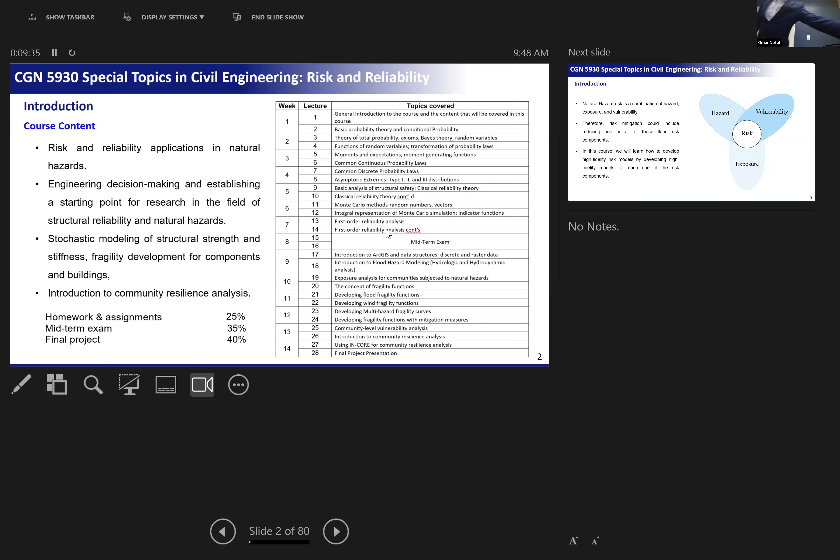So just to start with, what I'm looking for from this class is to get you to be a risk modeler or a catastrophe modeler. When we talk about catastrophes, there are 3 main components: hazard, exposure, and vulnerability. We need to look into these 3 things, because they make a community at risk. So what do I mean by risk? Let's say a hurricane is approaching Florida. That's a hazard, right? It brings wind, flood, storm surge, waves. Those are hazards driven by the hurricane.

But the hazard alone can't make a risk. You need people or built environment to be exposed to this hazard. If a hurricane is approaching Florida, that's a hazard, but it doesn't make a risk in Texas or California. So there's an exposed built environment under this hazard. We need exposure so that we can see some risk. When the hazard makes landfall, it's gonna make some buildings exposed to wind, some exposed to flooding, some exposed to combined wind and flooding. That's what we call exposure.

And when we talk about exposure, we need to know the intensity of the exposure, because maybe a building can be exposed to 40-mile-per-hour wind speed, and another building is exposed to 100-mile-per-hour wind speed. So that's what we are looking at.

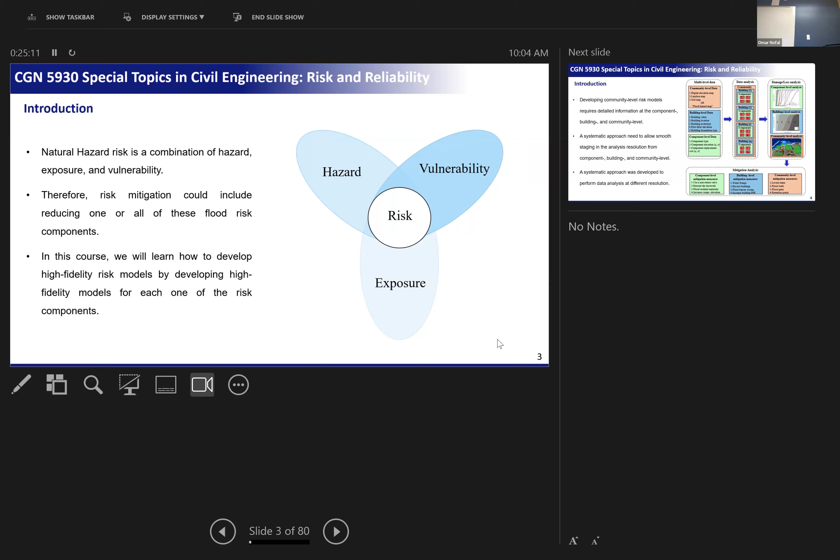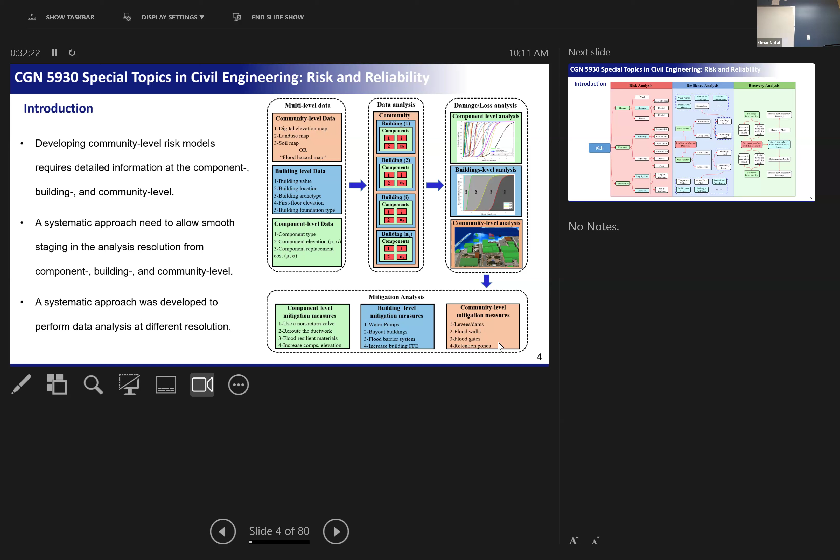Okay. So there's a lot of stuff that we can do. From what I said, you can do a lot of things in this field. You can be hazard modelers. There are people that only focus on the hazard. They don't know how to do vulnerability or risk modeling, and they limit themselves to this area. I'm not saying that they are bad, but I'm saying that they are experts in hazard modeling.

So they do wind hazard modeling, flood hazard modeling, wave modeling. They develop hydrodynamic models, they look at the weather, and that's what they do before a hurricane. They use the information about the weather and the temperature in the sea, take all this information, develop a bunch of models, and provide you with projections of the wind field of the hurricane and the expected storm surge. That's what we call hazard modeling.

And then some analysts take these hazard models and combine them with the built environment to see what is exposed. So you can have buildings exposure, you can have networks exposure. You look at what residential, businesses and social institutions are going to be exposed, and what parts of the transportation network are going to be flooded.

And vulnerability, that's the engineering part, because who can talk vulnerability should be an engineer, because engineers know what this building can take, given the loads on these buildings. Let's say a wind speed of 100 miles per hour is going to hit a building. Who can make an estimate that this building is going to get damaged? An engineer that knows that this building cannot survive this wind speed. So that's our area, the vulnerability model.

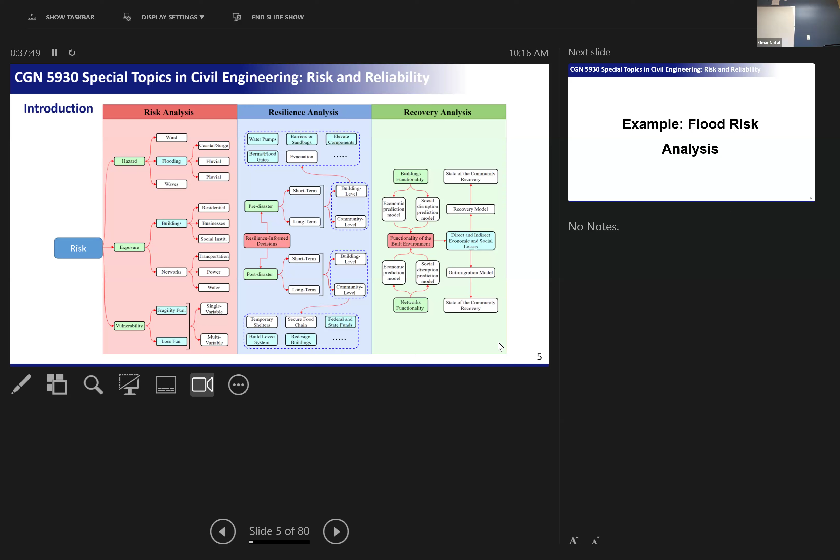Okay, so let's say that both of them are damaged, but you start working very hard on the recovery of your house, but your boss didn't start on the recovery of his business. So all of them need to recover at the same time. So it's a very, very complex process to look at. And there's a lot of research right now going on in this area, how to expedite the recovery of the community.

Okay. All right. I'm going to give you an example. We have like half an hour, so I'm going to give you a flood risk analysis example. Did you guys watch this video? Am I saying it a little bit differently? It's more detail here, right? So I'm going to cover right now the flood risk analysis, but maybe next time we're going to cover the hurricane, maybe not, depends on what I'm gonna plan.

But hurricanes and floods are the same thing. The flood example that I'm having right now, I'm only focusing on the flood depths. But for the hurricane example, I'm focusing on multi-hazard, like wind speed, storm surge, and waves. So it's the same concept, but one of them is a single hazard, one of them is a multi-hazard, but it's the same process.

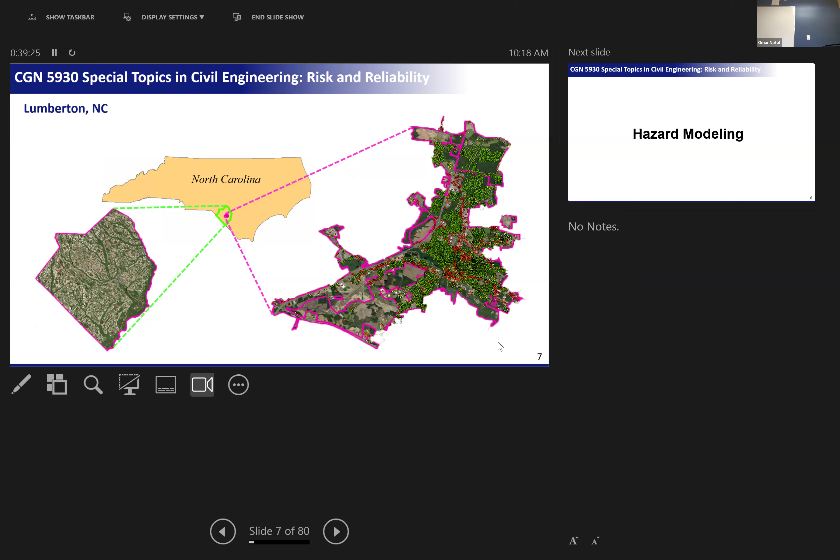It has around 20,000 buildings. All these green buildings are residential. Most of the red buildings are commercial, and the orange and yellow buildings are social institutions like hospitals, schools, community centers. So the first thing that we need to focus on, let's say a hurricane is approaching this county or this state, is how to develop a hazard model.

Okay. So we are going to focus on flood hazard modeling, but why are we doing flood hazard modeling? Because we need to do flood risk analysis. We need to identify the hazard, identify the exposed buildings, and do vulnerability analysis to provide an estimate of damage to this community. So for flood hazard analysis, the process starts with digital elevation map analysis. We have a digital map of the entire land.

Like the digital map tells me where's the lowest land, where's the highest land, so we know where the water is gonna flow. Okay, so we have the digital elevation map, and we understand the basin characteristics. Like we divide the whole land into basins, and these basins catch the water and take the water to the streams, and from the streams to the rivers, and the rivers to each other, and make one flood hazard map.

So we use information about the digital elevation map, definitely, because the digital elevation tells me where's the highest land and the lowest land, and about the soil, because depending on the soil type, it's going to tell me how much water infiltrates inside the soil and how much water is runoff. Like, let's say if I have a rocky soil or a clay soil, rocky soil is not going to allow the water to deeply infiltrate.

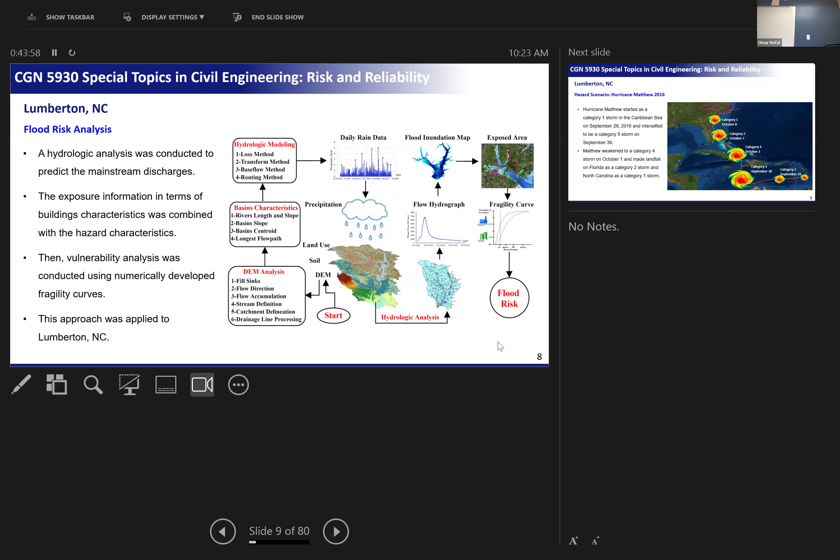And once you know the flood depths at each building, you can go to the vulnerability curve of this building. Let's say I found this building has 1 meter flood depth. I go in the fragility or vulnerability curve and know how much damage this building is gonna have. And I do this with a programming code. I make a for loop for each building, find the fragility, find the flood depth, use the fragility function and tell me what is the damage. Let's say this building is 50% damage. Once finished, go to building 2, building 3, building 1,000, building 100,000. And then you run the damage analysis for the entire community. All right, so that is the risk analysis process.

So let's see them step by step. That's Hurricane Matthew. It started as a Cat 1 storm in the Caribbean, actually intensified to Cat 5 in the Caribbean. But when it made landfall on North Carolina, it was Cat 1, on October 8th, 2016. So the thing is, our community is inland. So the wind speed wasn't that important for this community. Mostly the wind was very bad for the buildings on the coastline. But here inland, it's more the rainfall that is important.

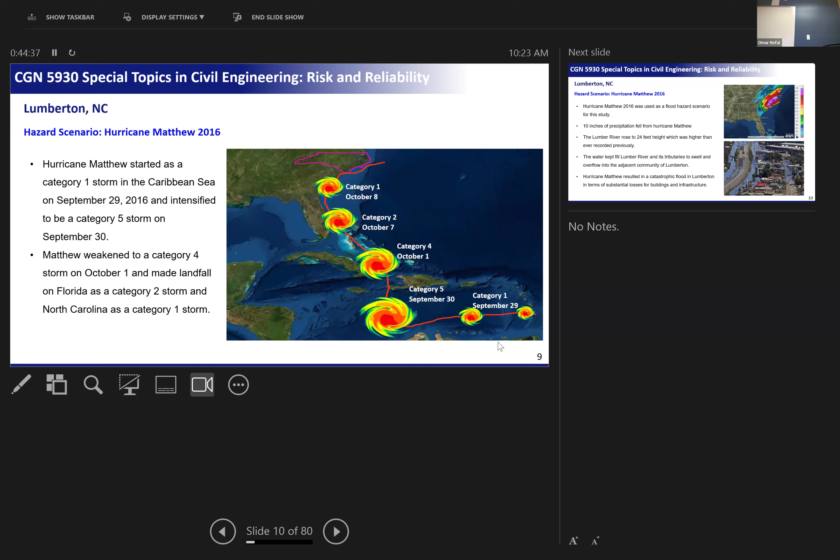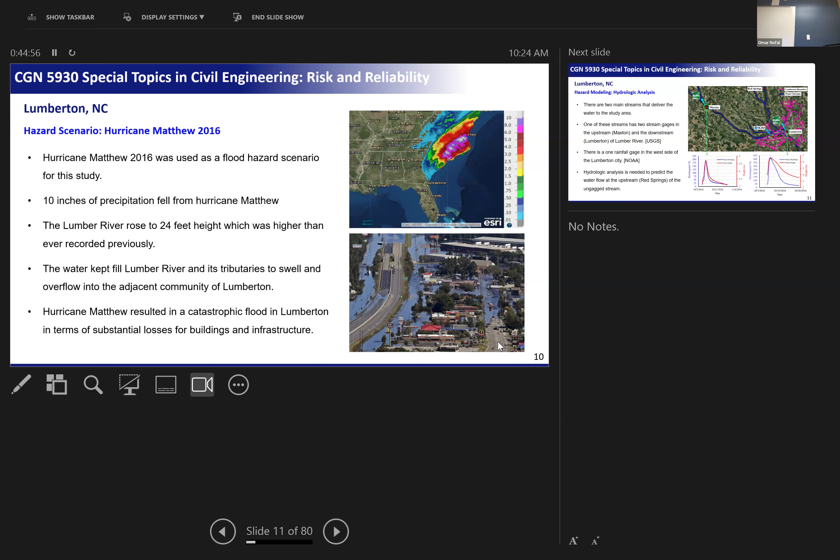So here it shows you the NOAA rainfall hazard maps with the intensity in inches. The purple color, which is here in this area where Lumberton is, is 10 inches of rainfall from Hurricane Matthew in this community. And this is actually a real picture of how the flood looked in this community.

So what we did, we got the hydrograph. What is the hydrograph? It shows you the water flow over time in the streams. Here it shows you how the water flow in this stream went all the way up, and then after the event went down. And here in the city, how does the water flow look?

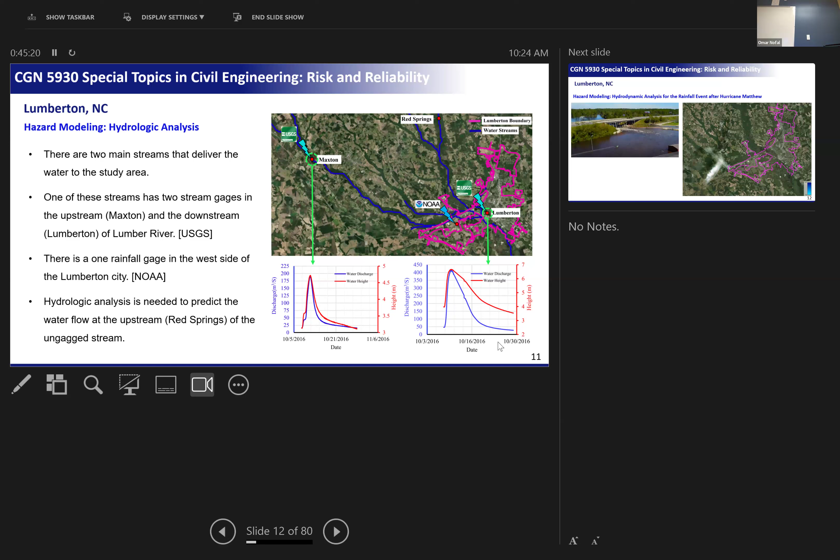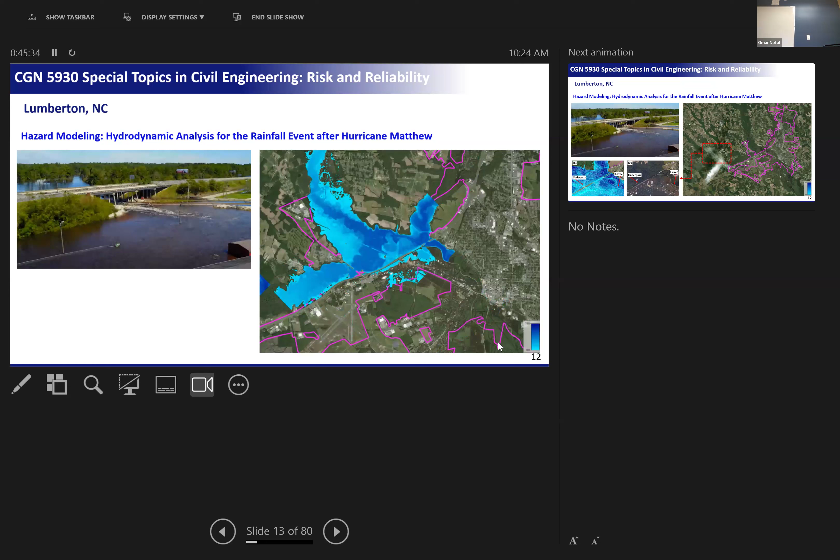So the second thing, we did hydrodynamic analysis. We use these hydrographs as boundary conditions here. And the hydrodynamic analysis tells us how the water overflows inside the community. So as you can see here, we captured everything, even that there's an underpass here. If you look, this is the location of this underpass. Here's how the water from the underpass was flowing, and this is how we modeled it in the hydrodynamic analysis. So that's what our model captured.

That's why we need a digital elevation map to tell us where the elevations are, where the openings are, where the water is gonna come from. All right, so also we modeled, okay, that's something that we're gonna discuss when we go to the probability and reliability. What you saw a few minutes ago was a real event that happened, and we modeled this event. Sometimes we don't model events that have happened.

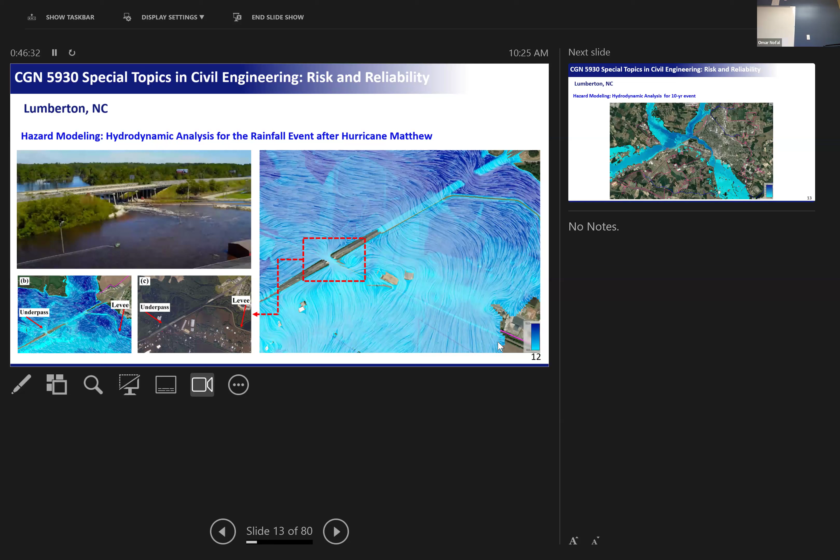We can't wait for an event to happen and then design our infrastructure for this event. We use hazard maps that are based on what is called return period. So for example, that's called a 10-year event. What does the 10-year event mean? It means an extreme event that can happen once every 10 years. Like once every 10 years, this community is gonna be hit with a hazard.

But the thing is, this community should be okay with a 10-year event, right? Because if this community is gonna be flooded for a 10-year event, every 10 years they are gonna get flooded. Okay, if you see here, that's a 10-year event. There's a minimum flooding that can happen. All these are a few inches. By the way, all these are the streams of water. If you see, all the water is contained within the rivers, within the green area. There is no overflow in the community.

Okay, but if we look at the 200-year event, an event that happens every 200 years. Look at this. That's similar to the hurricane last year that we developed. So the water can overflow within the community. That's what we need to design our communities for, mostly a 100-year event. We need our communities to survive a 100-year event flood hazard map.

For earthquakes, I believe it's much more, like 1,000 years or something, because earthquakes are more life-threatening. If the building collapses, everyone is gonna... but this one can be predicted, everyone can be evacuated.

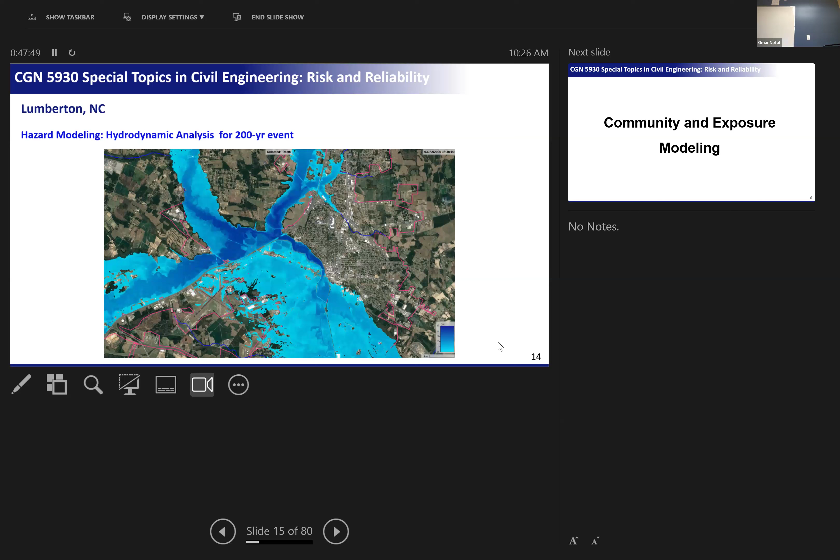All right, so let's say that we have the flood hazard map. The second thing is the community exposure modeling. As I told you, for community exposure modeling, we need to have detailed information about the community, about the buildings: number of stories, building occupancy, use, foundation type, and all this information. Why do we do this? So that we can assign archetypes, right? Do you guys remember that we need to group the buildings? How can we group buildings that we don't know information about? So we need to know all the information about these buildings so we can assign archetypes to them.

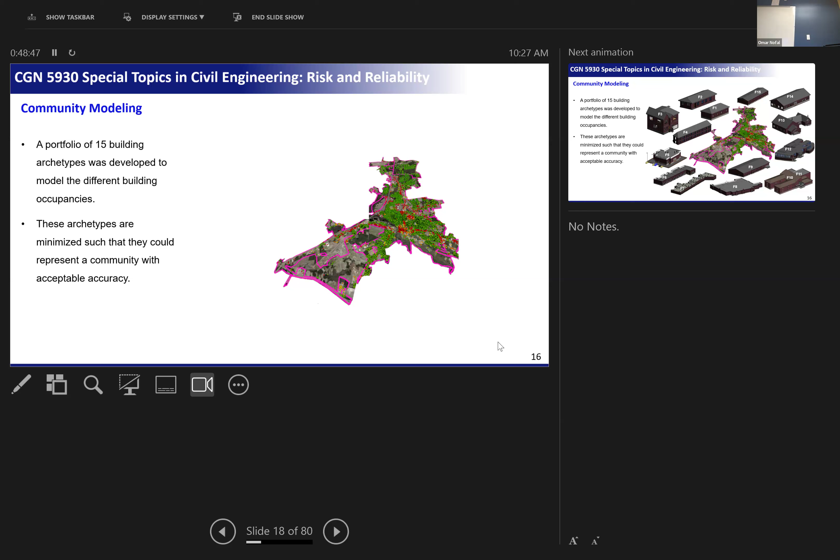And here I'm going to show you an example of how these archetypes look. So I told you that we can do 20 archetypes, 100 archetypes. But the more archetypes you have, the more work you are going to do, because you have to develop a vulnerability function for each one of these archetypes. So let's say that this is our community. What I did, I divided the buildings into 15 building archetypes, like 4 residential buildings, 5 businesses, 2 schools, 1 hospital, office building. So I tried to cover as many buildings as I have.

However, this can work for a mid-sized community, communities that don't have tall buildings. If we bring this to Miami-Dade County, it's not going to work, because here we have a lot of condos. We have a lot of buildings that are 10 stories and 5 stories. So we need more archetypes. So this can work for this community, but for other communities it cannot work.

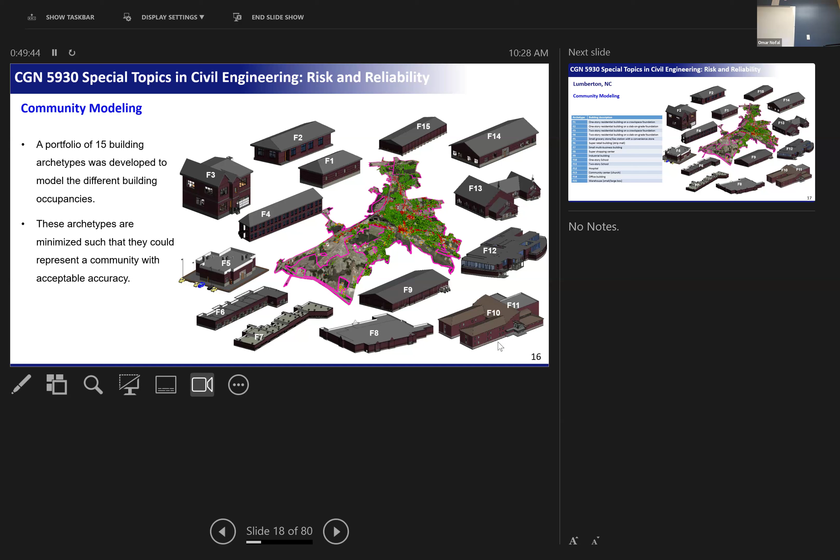Okay. So if I want to apply this to Miami-Dade County, I need more archetypes. But what if I don't have more archetypes? So that's what we call the limitations of the study. That's the only archetypes that we have, and we try to model the building within the limitations that we have. So you need to state that we have limitations, that we don't have enough archetypes to model the building.

Anyway, so that's the archetypes that we have, and that's the description of them. Some of them are residential, some of them are retail, multi-business, shopping centers. The second thing, so I told you I have the community and I have data about the community, I have the archetypes. I need to map these archetypes to the community. I need to know what is the archetype that matches every building. So we do a process that's called mapping process. We need to map an archetype to each building.

So let's say that this is a school and I need to map the archetype to this school. So we develop an algorithm that makes some if statements. If this building is a residential building, and if it is on a crawl space foundation, and if it is this, or if it is this, assign archetype 1. If this building is a school and the school is 1 story, assign archetype 11. If this building is a hospital, assign archetype. So that's what the mapping algorithms do. They map the archetypes to the building.

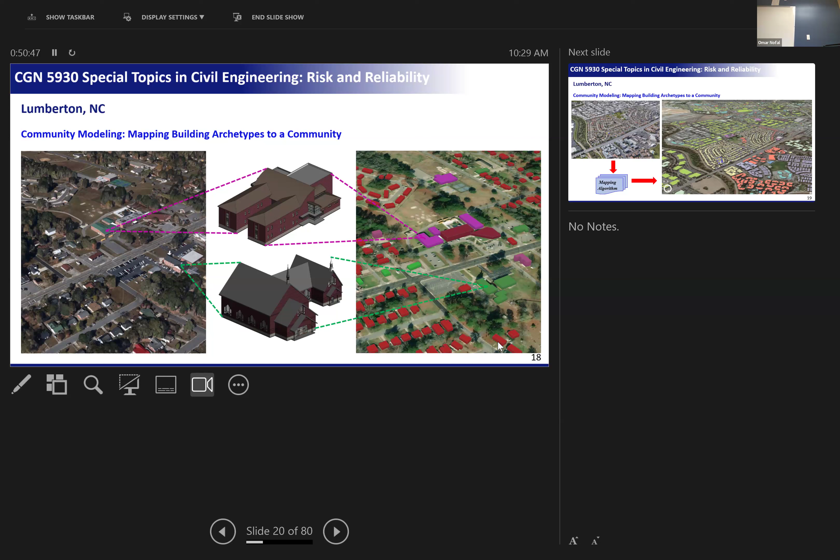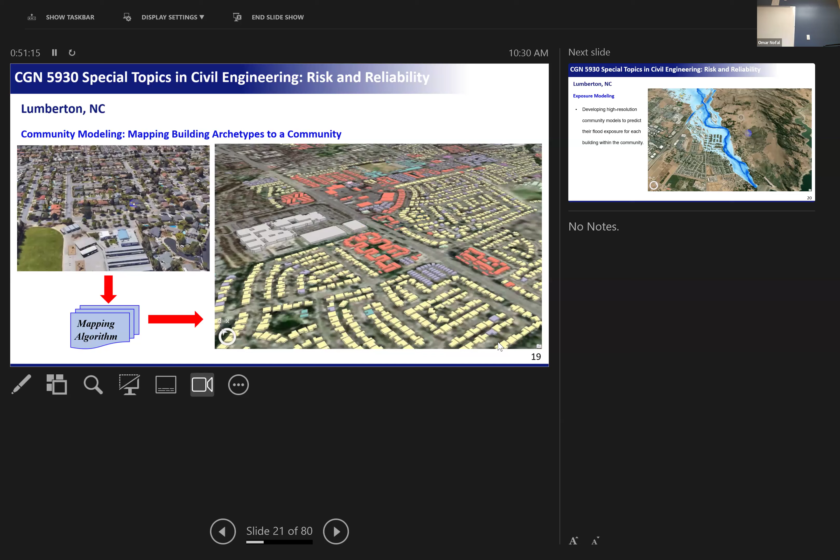Once they are mapped, they are going to look like this. So that's an example showing you how this algorithm was applied to a real community. So that's a community that I worked on in 2020. Santa Clara County has 500,000 buildings. It shows you on the left side the real community, on the right side the mapped community, color-coded based on the building archetypes. Then the next step is to overlay the mapped community, which is the exposure, with the hazard, so that we know what buildings are exposed.

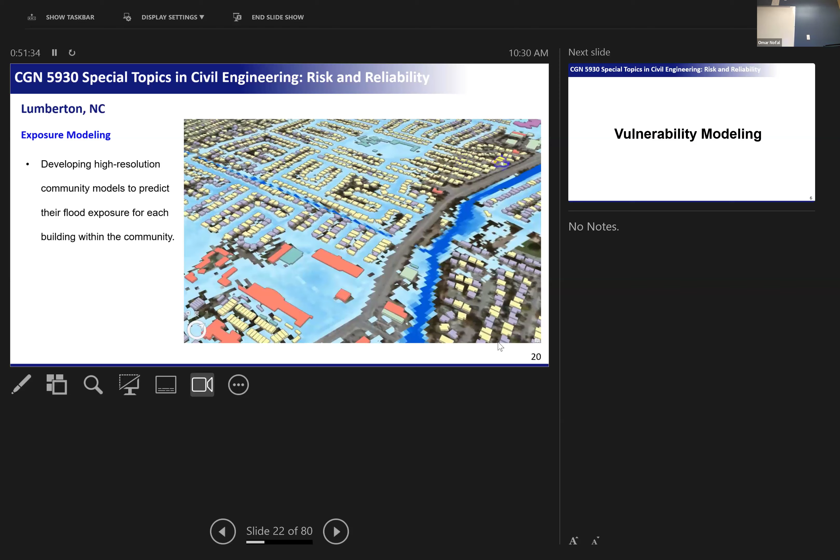Once they are mapped together, we can identify what is the hazard intensity at each one of these buildings. So right now, we have the hazard, we have the exposure, we know the exposure of every building. Next step is to do the vulnerability for each one of these buildings. So as I told you, we need to develop a vulnerability function. We talked about the fragility curve. For the fragility curve, we need to divide the building into components. Each one of these components, we need to get a fragility function for it.

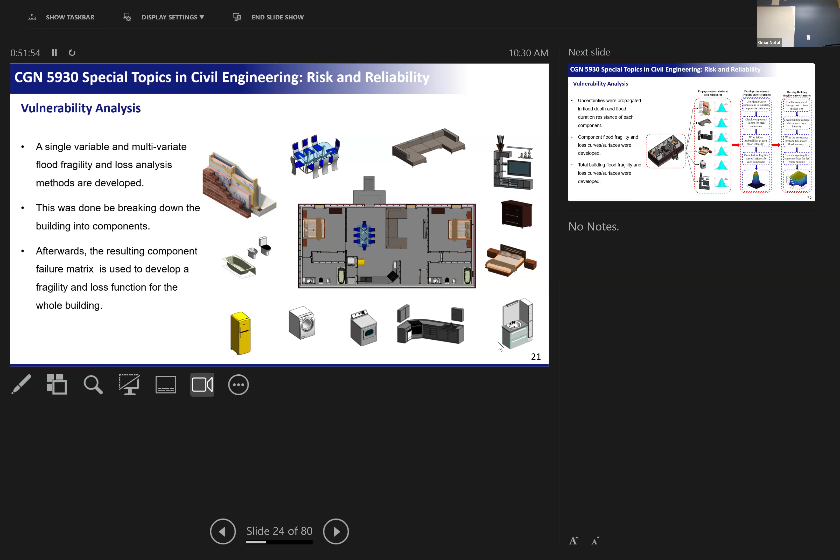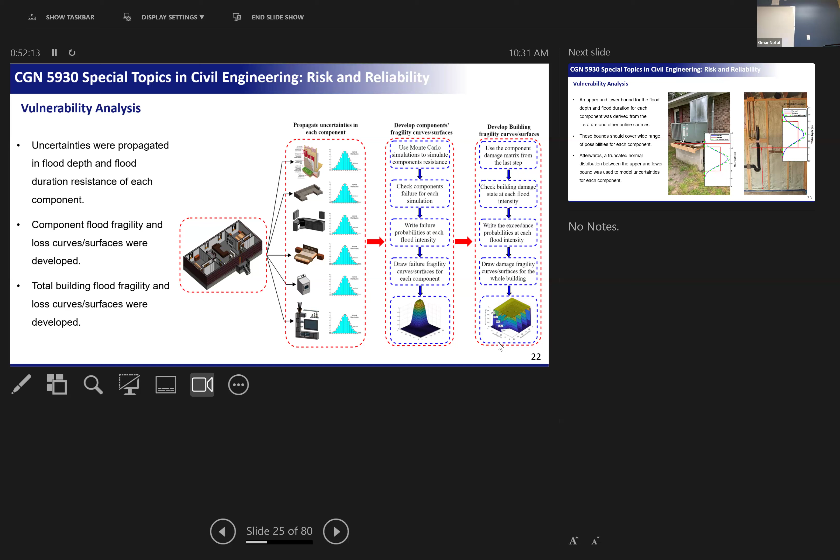Why? Okay, so when I did this normal distribution, that's actually when I developed it in a research paper. I was developing the MATLAB code, and I was generating a random number of the AC elevation. And I found that the AC elevation was at negative 0.2 feet, that means it's under the ground. Is that possible?

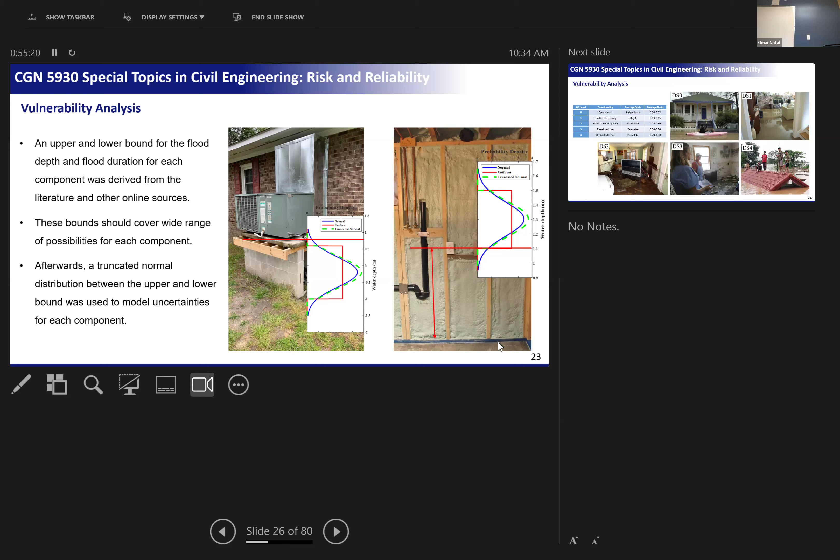Anyway, we apply the same concept for each component within the building. For the same example, if you have a TV, it can be up here or down here. People can have the TV on a table, or they can have it mounted on a wall. So the elevation of the TV is different. That's why we need to have a mean and a standard deviation of each component. And that's what we included in our archetype.

Then we talked about the damage states. This picture shows you a damage state description. Damage state 0 means the building doesn't have flooding, but maybe it has insignificant damage, like water around the building that damaged the landscaping or anything outside the building, but inside the building is good. Damage state 1 is slight damage, around 1 inch of water inside that can cause damage to the carpet and flooring.

Damage state 2 is like moderate damage, where your appliances and furniture are all gone. Damage state 3 is the extensive damage. Well, in damage state 0, after the water dries out, everything's gonna be good. We call this operational, like your building is gonna be operational and you can live in the building. Damage state 1 is kind of limited occupancy. Maybe you have water and you dry it out, and if you have tiles, you can live in the building, so it's limited. But if you have carpet, you need to change the carpet and bring people to do some work in your house.

But damage state 2, that's restricted occupancy. You will never be able to live in a house like this. You need to do some construction work to bring it back to normal. Damage state 3, that's restricted use. You can't occupy it and you can't use it. Damage state 4 is complete damage and that's restricted entry. You can't even get inside the house. So fix it and then get inside.

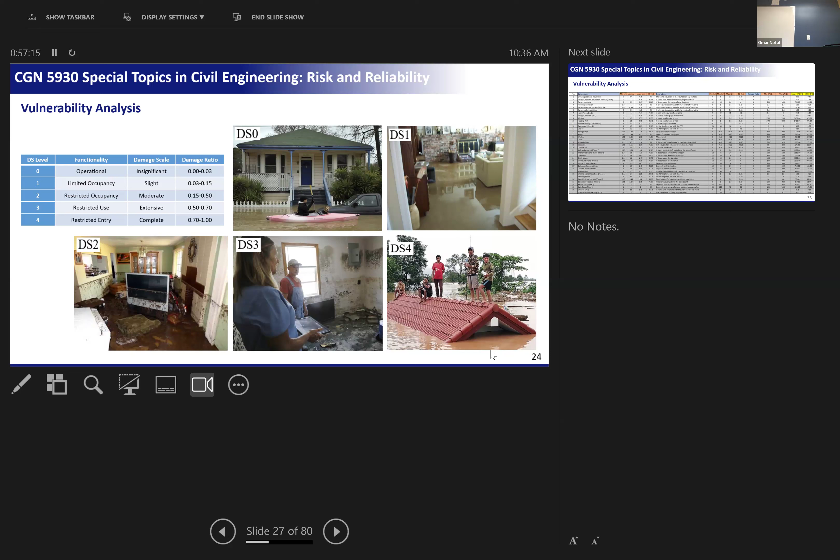All right, this shows you an Excel sheet that was developed for one of the archetypes that has all the components in the building. This is how I developed these archetypes. For example, you will see on top crawlspace base insulation, garage drywalls, insulation, painting, garage cabinet, garage electrical outlets, garage walls. All these are in damage state 0. Why? Because this is not inside the building yet. The garage is mostly at a lower elevation. So maybe your garage gets flooded and damaged, but the inside of your building is not damaged.

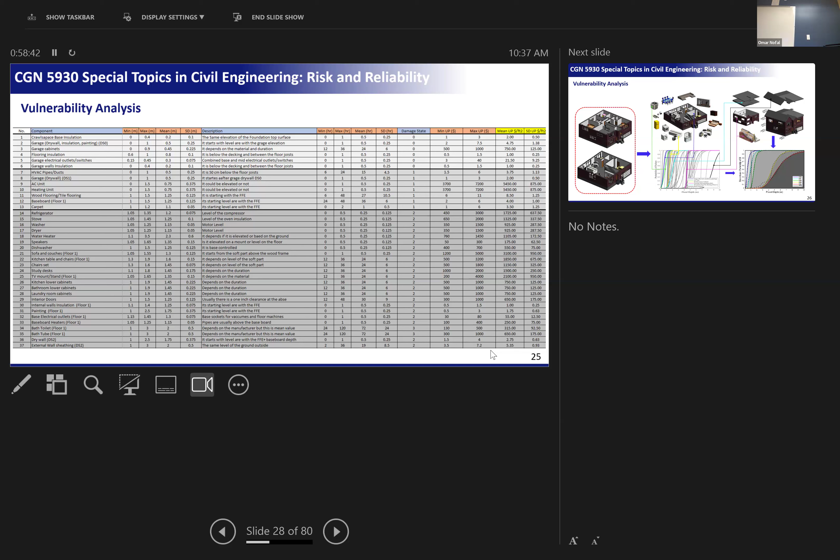And also same thing, maximum and minimum flood depths, maximum and minimum flood duration. Also, I was able to get maximum and minimum replacement cost of each of these components. Like some people would buy a fridge for $1,000, some people will buy a fridge for $5,000. So we need to have an upper and lower bound of these, and then we develop mean and standard deviation.

Once we have all these components, like here, for example, it shows you the fragility curve of each one of these components and how we move from building component level fragility to building level fragility. I want to talk about the dashed and the solid curves. When I develop the damage state fragility curves, they give me these curves. Can you see it's not smooth, like something like this, and that.

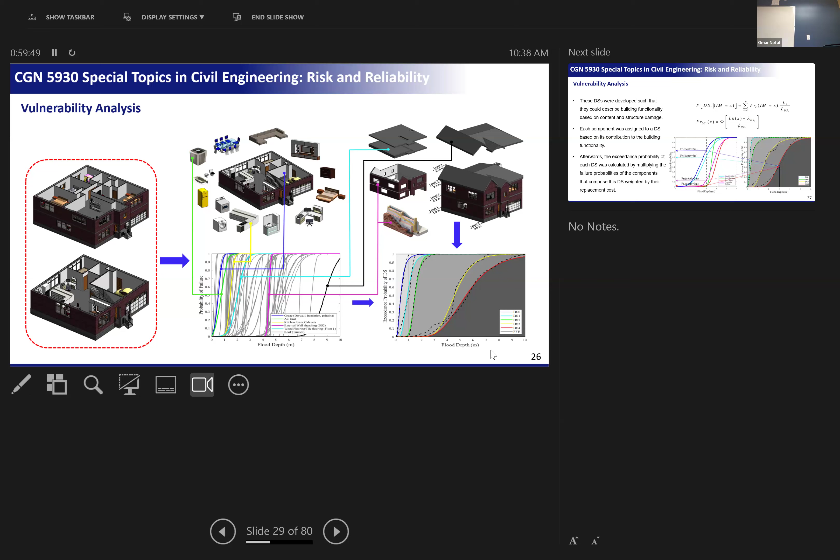So what we do, we make something that's called fitting. Rather than having curves that are broken, we fit this curve to a distribution. Like we fit it as a log normal, we fit it as a normal. We are gonna learn how to fit curves, and we use the fitted curve to do the vulnerability analysis, so the curves can look smoother and can be much better in the analysis. And I'm gonna talk about later why we do fitting exactly, because the analysis is going to be much less when we do the fragility curves.

And this shows you how a group of components, like these 5 components, contribute to damage state 4. The thing is, you told me that I need to group the components, and based on each group, I need to have one curve. But you didn't ask, how can I convert this? How 5 curves, I'm gonna convert them to one curve. We did a weighted average. But what is the weight that we can use to group these components?

You would tell me maybe we're gonna give them equal weight. Like let's say all these 5 curves are gonna equally contribute to this curve. We're gonna take their direct average. But there's some components that are important and some components that are not that important. Like let's say this room got flooded, okay? Let's say that this is a house, okay?

The fridge got flooded, but also the flooring got flooded and the walls got flooded. So changing the walls is gonna cost you $5,000. Changing the flooring is gonna cost you $10,000. Changing the fridge is gonna cost you $1,000. Which one is worse? The flooring, the one that is more expensive. So you can use the cost of the component as a weight, all right?

How about the roof got damaged and the fridge got damaged? Which one is worse? The roof, right? So we can't treat the fridge and the roof equally, we need to deal with them differently. So that's where the weighted average kicks in, based on the replacement cost of the component with respect to the total cost of the damage state, so that we can come up with one curve.

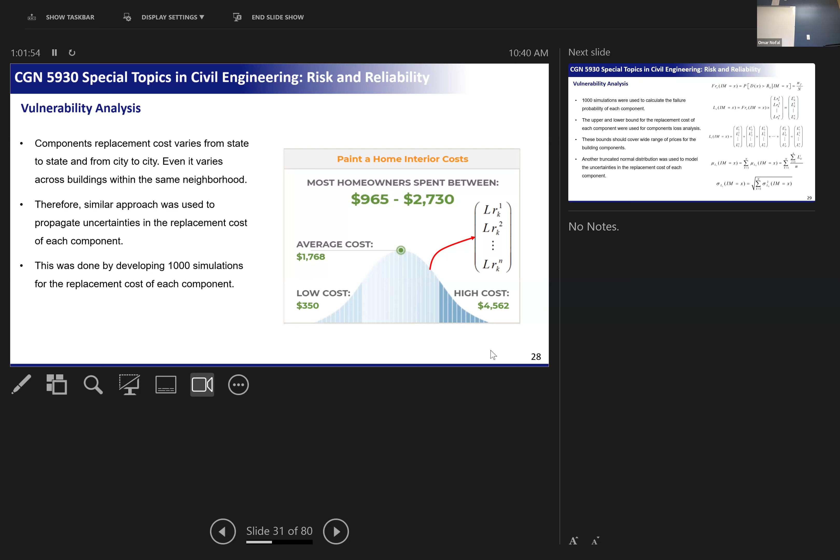Same thing with losses. We have an upper and lower bound. I was able to get loss estimates from HomeAdvisor. It gives you how much homeowners spent on replacing a component, like between $900 and $2,700, for example. And then based on this, we do some loss analysis to come up with the mean and standard deviation of the replacement cost of the component.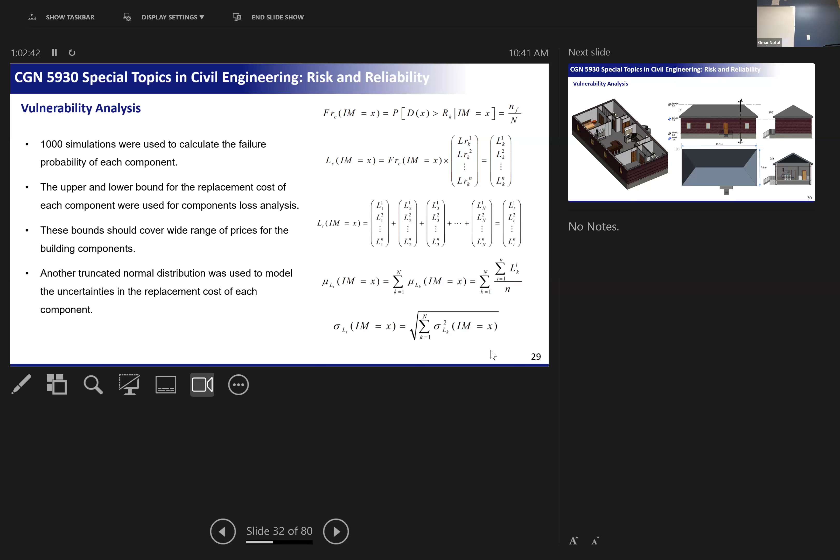Basically, let's say this component is gonna cost me $1,000 to replace, but the probability of failure of this component is 50%. What is the loss for this component? What is the predicted loss? We multiply the probability of failure of the component by the replacement cost of the component. If this component is $1,000 and it has 50% probability, 0.5 by 1,000, so the expected loss is 500. But if it has a probability of 70% to be damaged, then 0.7 multiplied by $1,000. So that's what we do here, multiply probability by replacement cost.

So we applied this for many archetypes, including residential, and these are the curves that we have. This is the component fragilities, this is the building fragilities, and that's the loss curve at the end. This loss curve tells you at 2-meter flood depth how much money or how much percentage the building is going to lose based on the probability of failure of each component and the replacement cost of the component. Okay, we're going to talk about why we have these different curves.

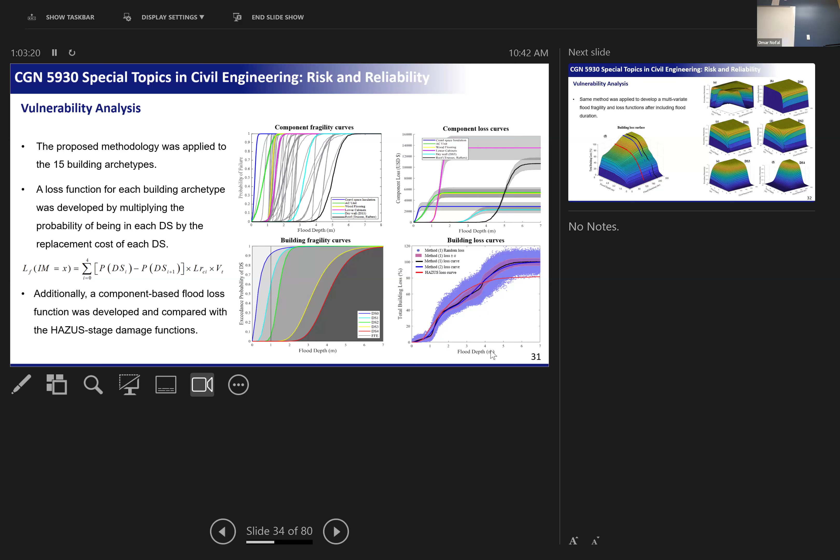At some point in my analysis, I included not only the flood depths, but also the flood duration: how the combined impact of flood depths and flood duration is going to impact your component. Let's say this, okay? You have 2 inches of water, and you were able to dry these 2 inches of water inside your house in 1 hour. Will you replace this table? You will not replace this table because you dried out the water very fast.

This table usually is made of particle wood. Particle wood, if it's in water for a long time, you cannot salvage it; it's gonna be damaged. But let's say this was in water for like 1 day. Definitely at the end, you are gonna find the volume of this wood increased and you have to replace the whole thing. So water is very important.

However, there are some components that, if they just get touched with water, are done, like electronics. But it also depends. Let's say this thing goes on the ground, but the water touched it, like, 1 centimeter. It didn't touch the water-sensitive area, like the processor or the screen, so it's not gonna get impacted. Or let's say you have the fridge and the water touched 1 or 2 inches of the fridge, but it didn't get to the motor or the compressor or the electronics; it can survive. But still not too much time, maybe half an hour or 15 minutes or something like that.

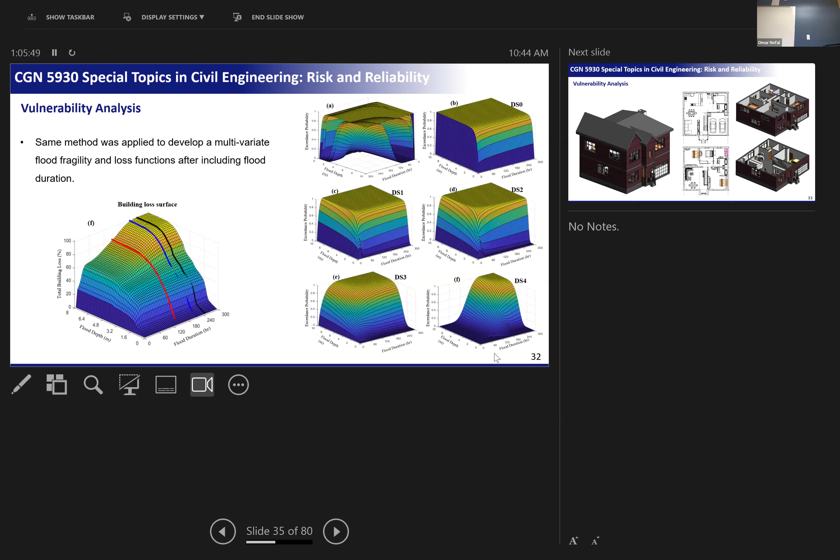Let's say that your house is submerged in water for 1 day, like you got a flood depth of 5 meters and your house is underwater. Everything's gonna be gone, but you can salvage the structural system. You can salvage the foundation, you can salvage the walls. But if it stays for a long time, scour can happen, a lot of things can happen. You cannot even salvage the structural system.

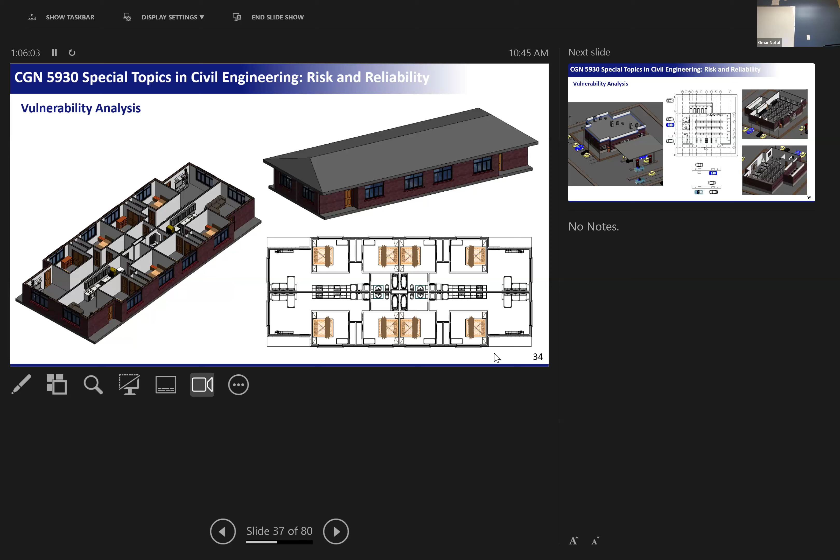Okay. All right, these are some of the buildings that we applied this concept to. That's a residential building, 2-story, 1-story, multifamily building, a gas station. That's actually a real Walmart. Strip mall, office building, school, hospital, church. And these are the fragility curves for these 15 archetypes, and these are the loss curves. Can you see the difference? That's why we grouped them. Some of them are low, some of them are high. So if we added more, we're gonna see more curves.

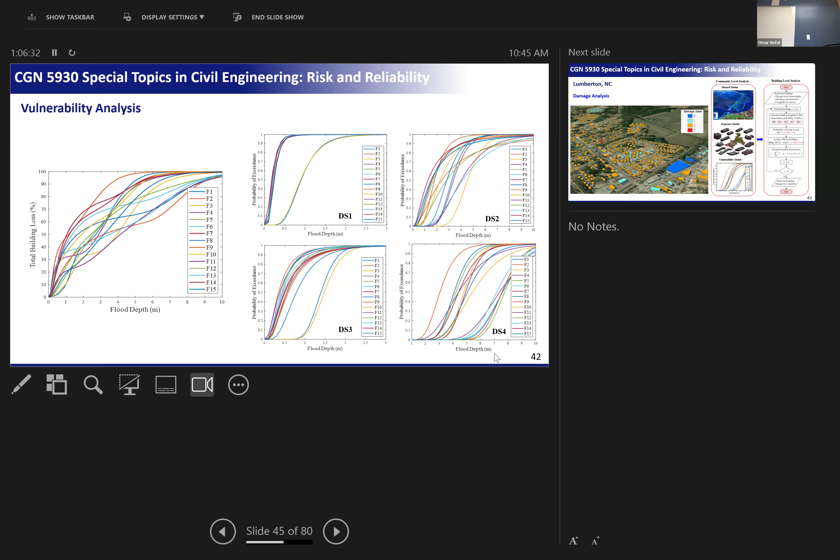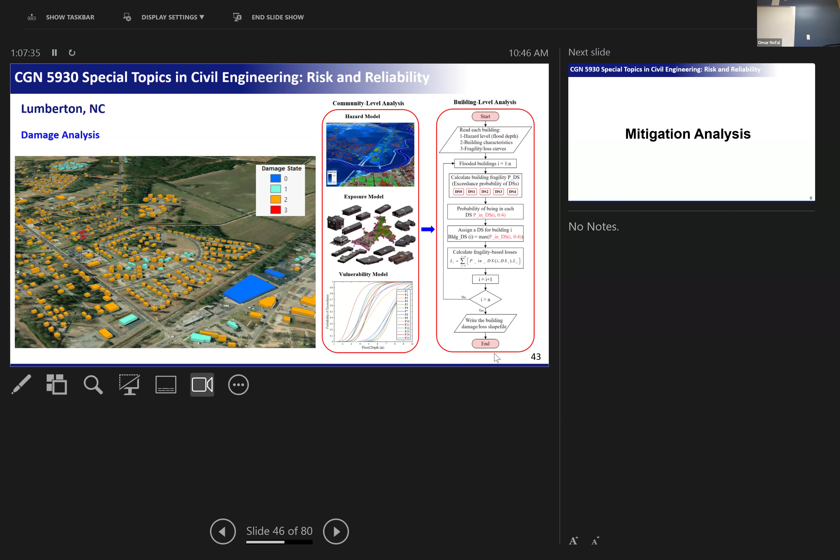So right now we finished the flood risk analysis. Next time I'm gonna show you how we can take it to mitigation. And then we are gonna talk about the hurricane hazard. I'm just making an introduction for you, to know the scale of the analysis that we can do with the knowledge that we are gonna build in this class, okay?